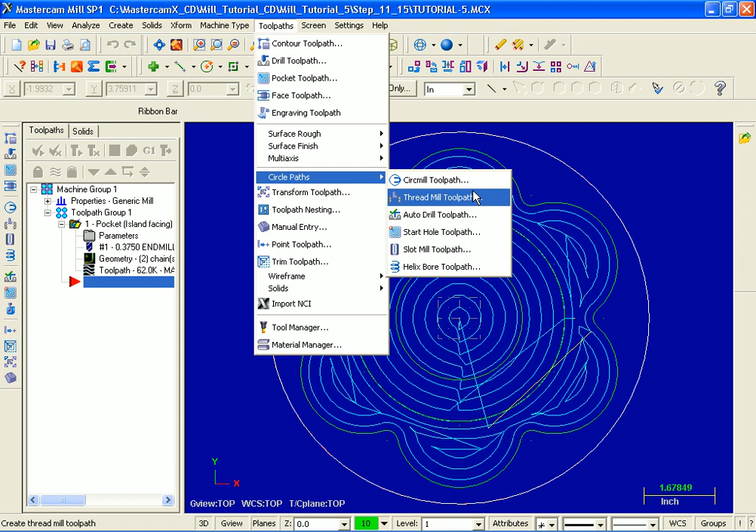Let's get started. I'm going to move up and select tool paths, next circle paths, and then over to the right I'm going to pick circ mill toolpath.

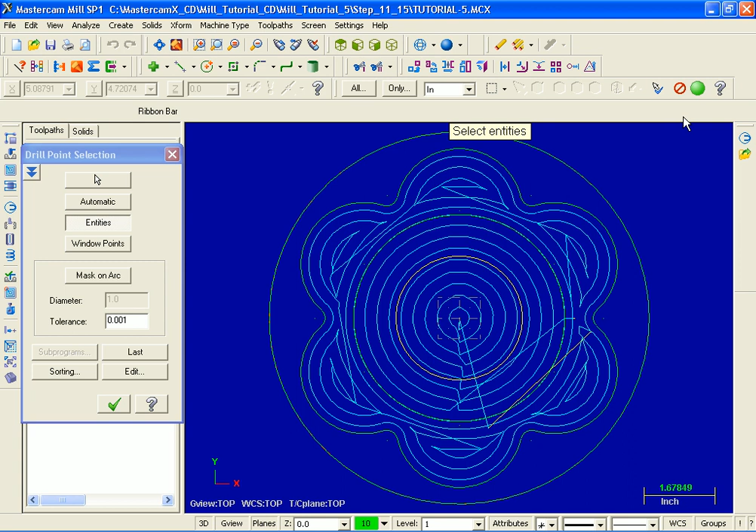Over on the left in the drill point selection dialog box I'm going to pick entities, and when prompted to select entities, I'm going to move on down and pick the 3-inch diameter circle. Once I've picked it, I'm going to move up now and select end selection.

Moving over to the left, I've finished in the drill point selection dialog box. I'm going to pick OK, and now's the time to select a 1/2 inch diameter end mill.

I'm going to pick select library tool and then move over to the right and pick filter. In the tool types section I'm going to pick none to disable any previous selections, and then I'm going to pick the icon for flat end mills.

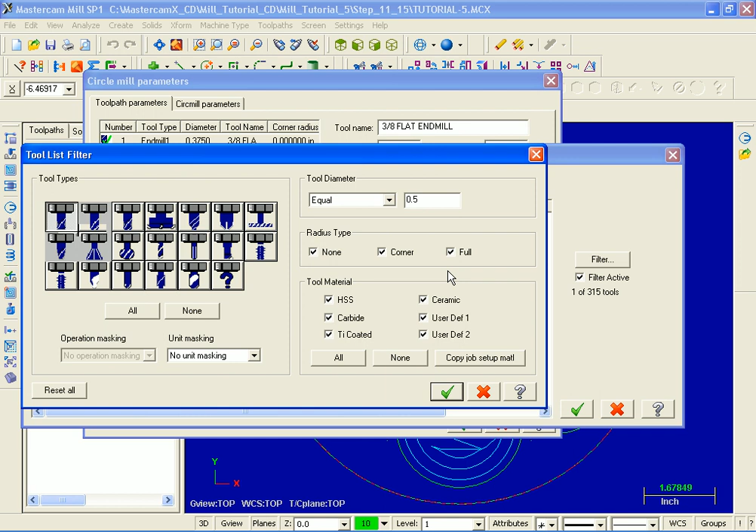In the tool diameter section you can see I've got it set to equal and the diameter is set to 0.5, exactly what I need. I'm going to pick OK, and as you can see we successfully filtered out a 1/2 inch diameter flat end mill. I've selected this tool. I'm now going to go down and pick OK.

This is tool number 2. I'm going to change the length offset to 2. Down in the comment area I'm going to type in rough and finish the 3-inch diameter through hole.

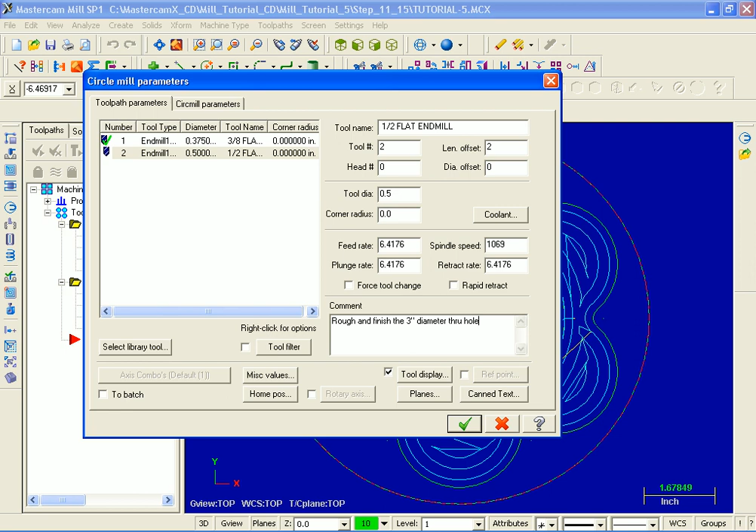Everything looks good here. Let's move over now to the next page, circ mill parameters. Clearance, retract, feed and top of stock are all set correct. I'm going to change the depth to -1 inch.

Moving on down to the left corner, I'm going to activate breakthrough and then select the breakthrough button. I'm going to change the breakthrough to 0.1. We're going to break through the bottom of the part, 0.1. I'm going to pick OK.

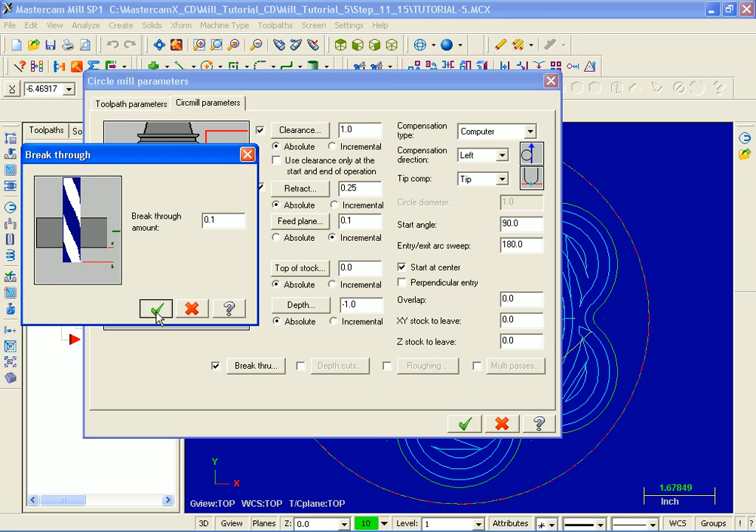Moving over to the right, I'm going to activate depth of cuts and then click on the depth of cuts button. For the maximum rough step I'm going to change that to 0.25, and the only other thing that I'm going to change here is activate keep tool down. Next I'm going to pick OK.

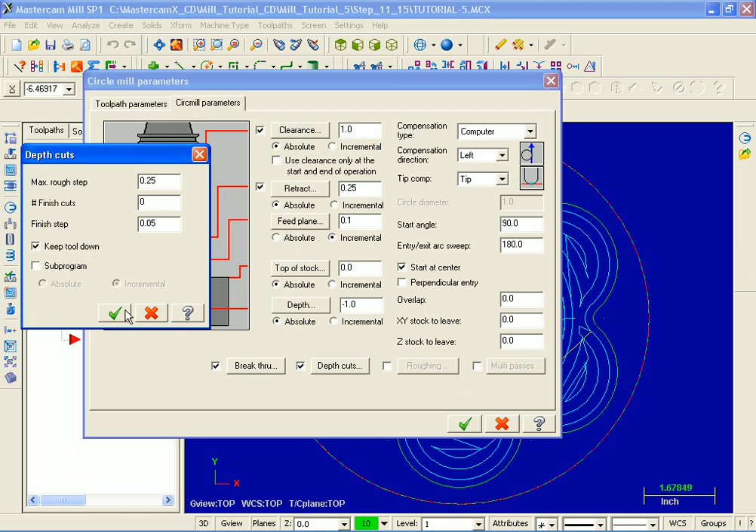Moving over to the right I'm going to activate roughing and then select the roughing button. Starting at the top you can see the step over is 50%, that's 50% of our 1/2 inch diameter end mill, which equals 1/4. The only thing that I'm going to change here is check against skip if helix fails. I'm going to pick OK.

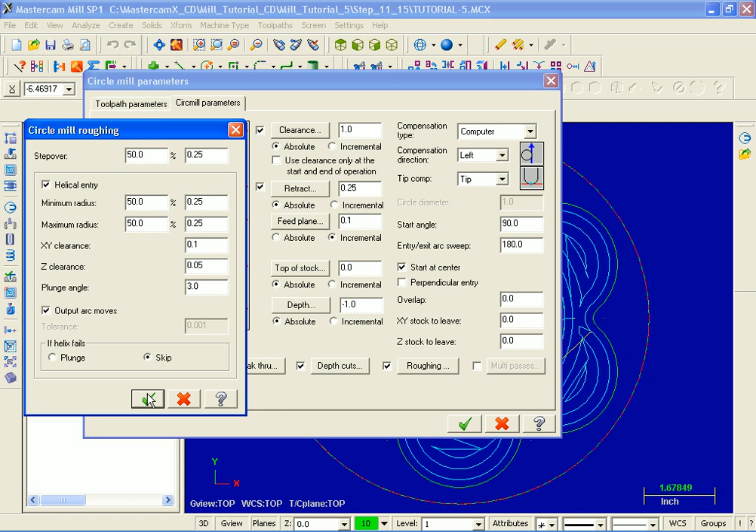And then right at the bottom I'm going to pick OK again. Let's backplot all our operations. I'm going to move on up, select all operations, get an ISO view, and next I'm going to select the icon for backplot.

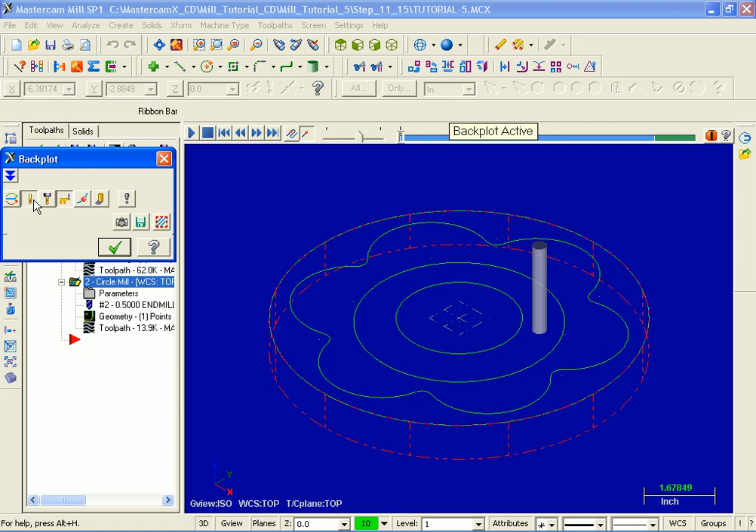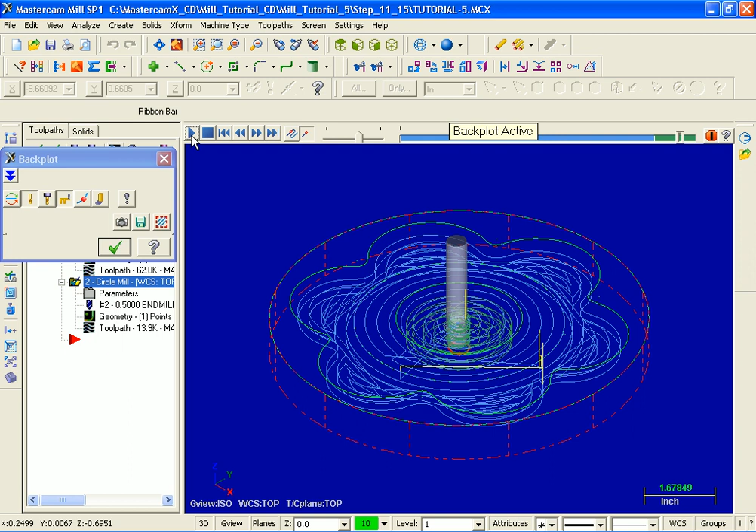Display tool is activated and display rapid moves is turned on as well. Let's hit play. And everything looks good here. I'm going to pick OK.

Next we're going to verify all the tool paths. They're all selected. I'm going to move on up, pick verify. Just move this dialog box up. I'm going to move on down and select configure. As you can see the shape is set to cylinder. The only thing that I want to check here is change tool color. I've got that activated and everything looks fine. I'm going to pick OK.

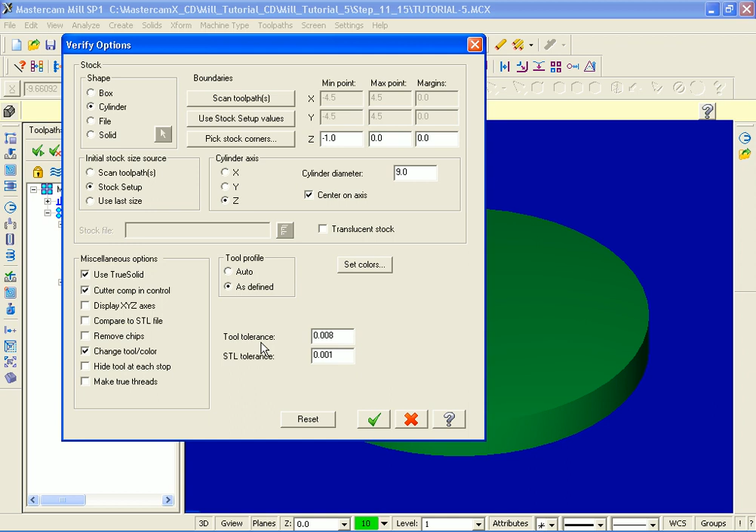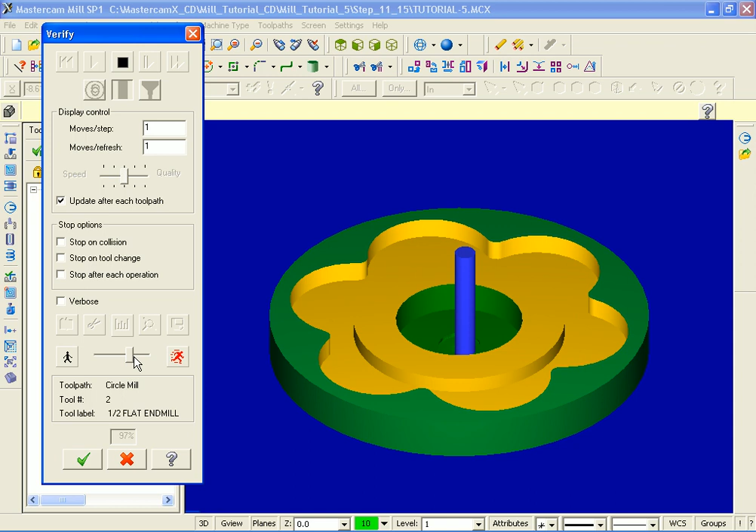And let's hit machine. There's our first operation. Just going to slow it down, and there's our last operation, our circle mill toolpath. Just going to speed it up, and that looks great. I'm going to pick OK.

Let's now go and post the file. All the operations are selected. I'm going to hit post selected operations. Not going to change anything here. Just going to pick the OK.

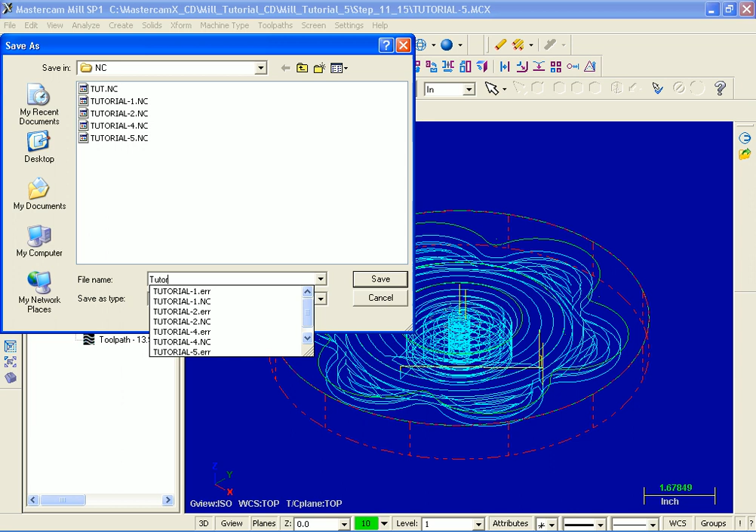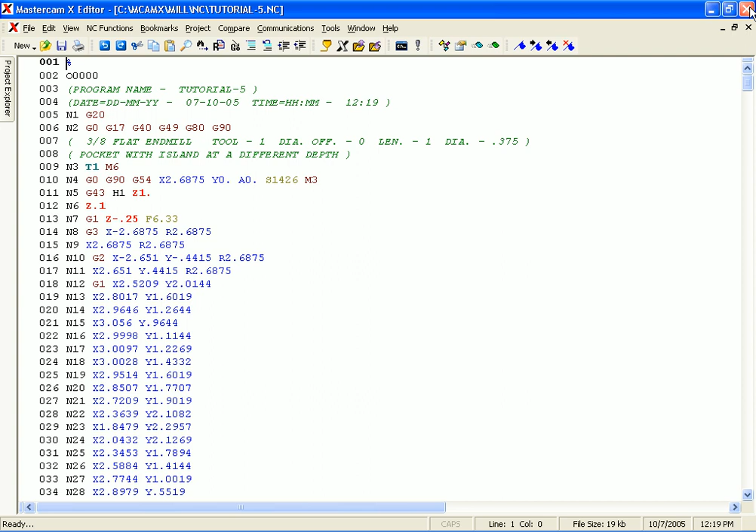I'm going to type in tutorial 5 for the name of the CNC file. And there's our CNC code for tutorial 5. I'm just going to go up to the right hand corner, close this up, and then for our final operation we'd move on up and save our file.

Well, that completes tutorial 5, and that's the end of this video. Thanks for watching.